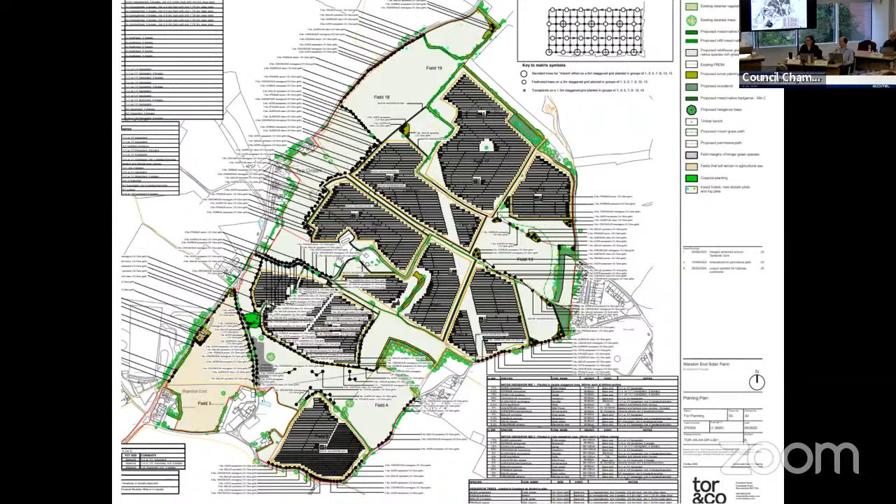This is a plan showing tree protection, with a few trees in red, category U, trees to be removed.

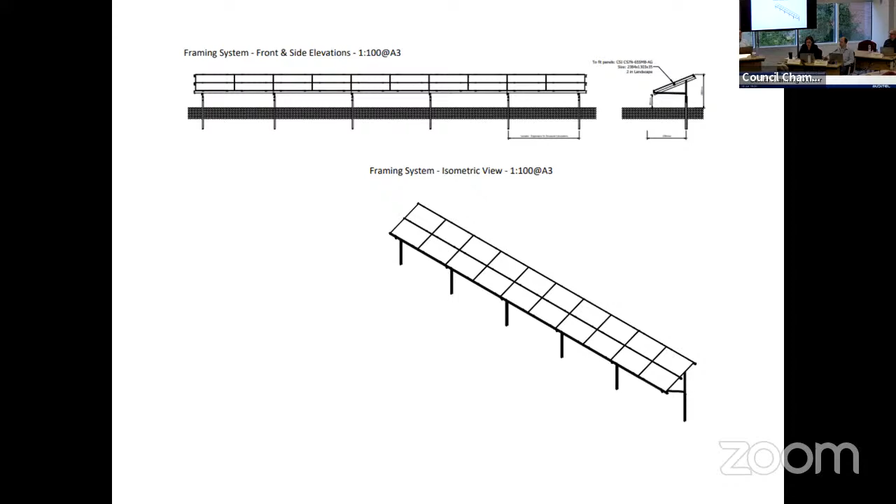This is a plan showing the typical section of the frame with panels.

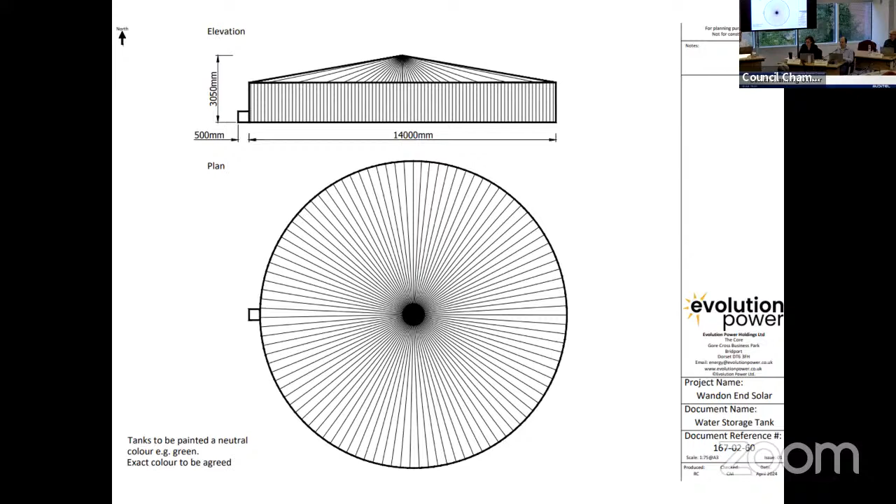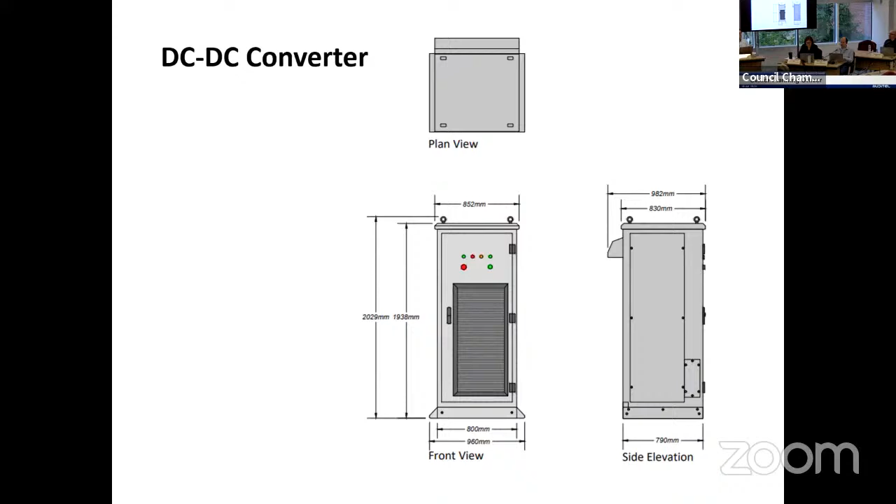This is a plan showing the proposed water tank, one of the proposed water tanks. This is an inverter. And a converter. And a typical battery container.

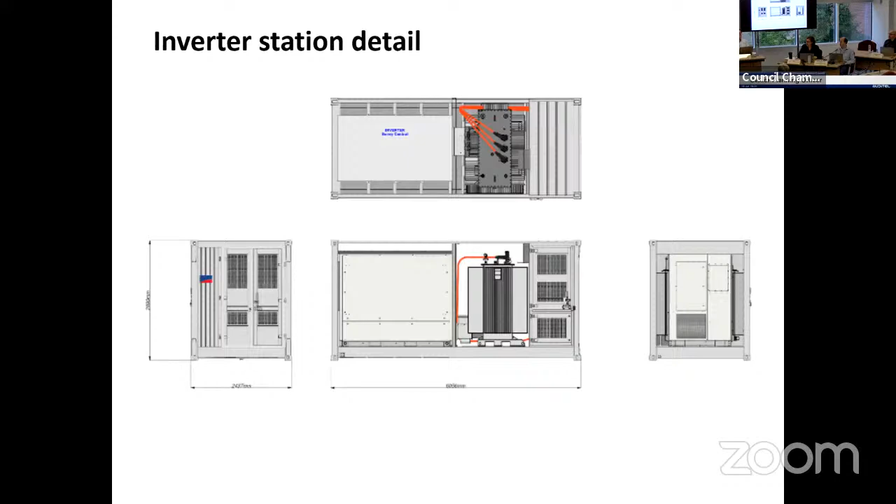Inverter station detail, and a zoomed-in section showing what the batteries would look like within the fields of panels. There'll be 11 little pods, each with 4 batteries, 6 converters and 1 inverter.

It's a little zoomed in for you, and that's it. Thank you very much.

Excellent, thank you very much Sarah. Do members of the committee have any questions for the planning officer? Yes, Councillor Brown, a couple of questions.

So there were two photographs, I think, where it looked to me like there was a crest, a crest of a hill, and the proposal suggests putting panels on that crest. Am I right in thinking that? And how visible will those be?

Sorry, do you remember where? Well, it was about the 3rd or 4th one - there was a green field where it looked like it was on the crest, and then towards the end where you mentioned the sensitive bit, you said there are going to be panels but you wouldn't be able to see them. I wasn't entirely convinced. Can you go back over those two areas?

So there are two bits - the first towards the beginning, yeah, I was at the northern end of the site.

There was kind of a plateau, and it's not until the mill, the listed building, where there's a sort of ridge that's quite well planted, and then it slopes down more dramatically to the Lilley Bottom character area. So I felt in landscape terms that the panels at the top should be kind of less dominant on that plateau, and there'd be panels on the 2 sides of that right of way.

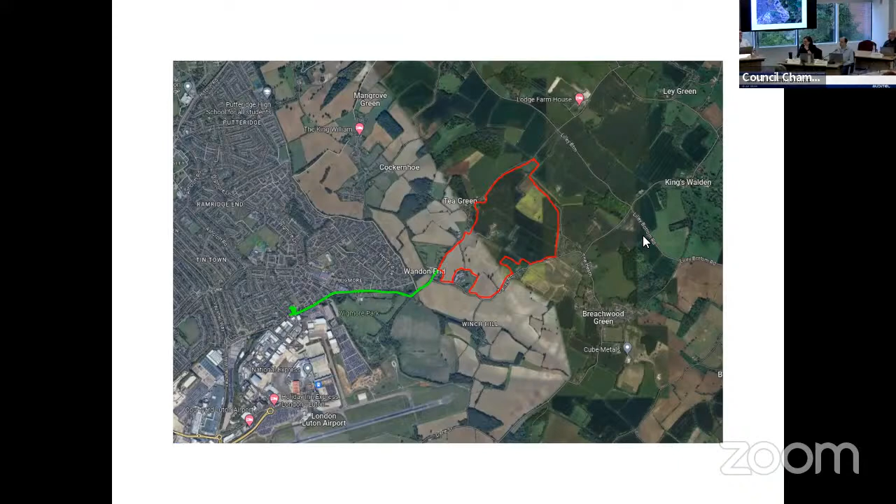While we're finding that - my question was around the rights of way, because I think when we had the zoomed-in look at the site layout, it looked like there was potentially going to be quite a narrow gap between the solar panels and those public rights of way. And I've seen the comments and notes of concerns raised by members of the public around those rights of way. So just for our benefit, what is the width between the solar panels and the next set of solar panels where the right of way dissects them?

So the right of way needs to be 10 meters wide, and presumably that's between the fencing. The definitive width of 10 meters must be preserved. There will be a right of way plan to get that detail. The amendments to the scheme have tried to secure an open side to the right of way where possible. Obviously that can't be achieved everywhere, but as much as possible.

Thanks, Chair. I think I was thinking along the same lines as you. So that access, the retained right of way, has fences on both sides. Do we have any idea of the nature of the fences? I think I saw a comment somewhere about concern about it feeling tunnel-like. Do we have any more information on the nature of the fences and lighting for that? I can see issues either way, but is this going to be somewhere people are going to be happy to walk down?

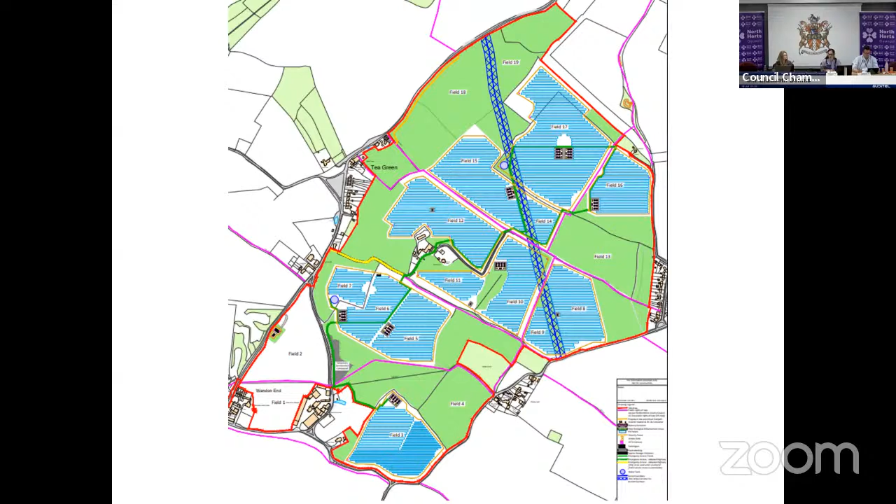The relevant sections of the NPPF have been set out in the report. I think pages 48 and 49 are quite helpful on that. We've also got comments from officers around the greenbelt, weighing up the various harms and the cumulative issues as well. There's also, later on at page 88, the conclusion on the renewable energy benefits, which has been indicated by a number of people this evening.

This is a finely balanced application, and we need to make sure that we are apportioning weight to matters that are relevant. When we set out our decision, whatever decision we reach tonight, we need robust reasoning, having taken everything into account and weighed it appropriately given the planning balance, policy statements, and this council's policies in the relevant areas.

Councillor McDonnell: I just wanted to bring up the subject of the limited time period of the solar farm. The 40 years starts from the time it starts to produce electricity, so this potentially brings it to 42 or 43 years, depending on construction time and getting it online. 40 years is just not temporary — that's potentially two-thirds of somebody's lifetime. It is a long, long period of time, and that concerns me, because for some people this will be their whole life living with these solar farms.

I'm going to put our planning lawyer on the spot and ask if there's a definition of temporary.

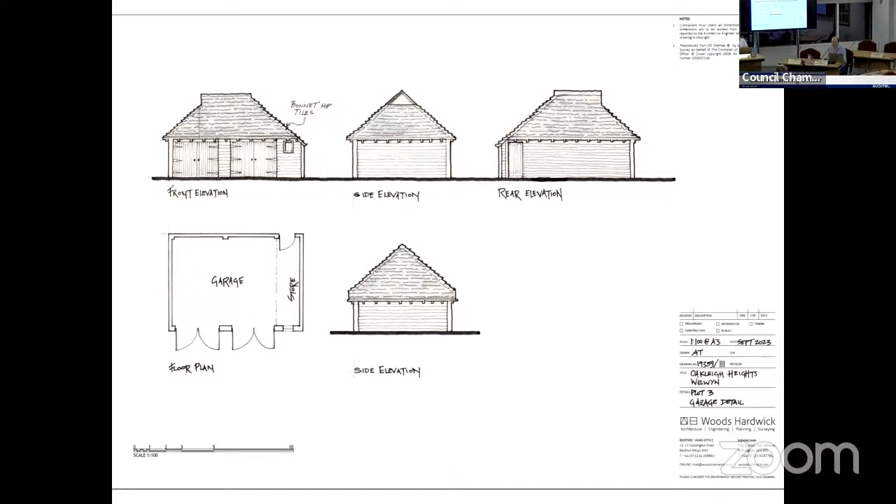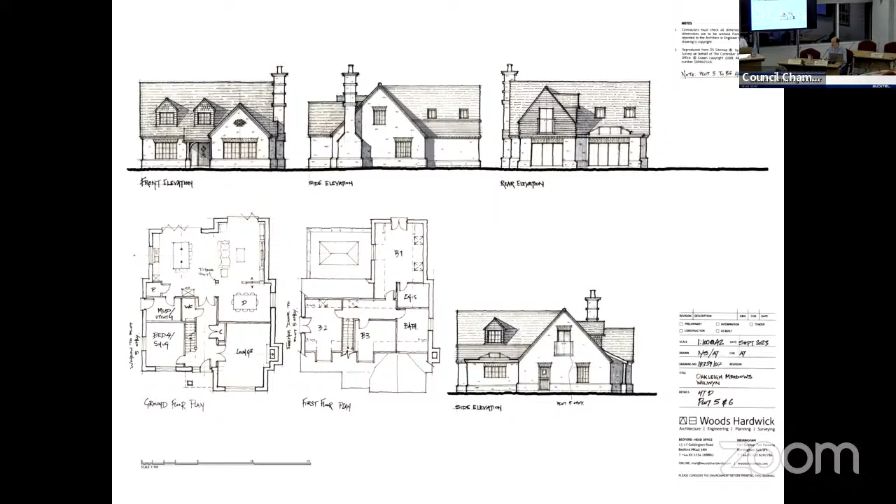The garage outbuilding proposed for plot 1. Next slide. The garage outbuilding proposed for plot 3. Next one. This is the elevations for plot 2, which is southeast of plot 1. Next one. The plot 4 elevations, which is southeast of plot 2.

The plots 5 and 6 elevations, which are south and southeast of plot 4. Next one. A garage and carport for both plots 5 and 6. And next one, plot 7 elevations, which is southwest of plot 6. Next one, an artist impression of the area focusing on the dwellings.

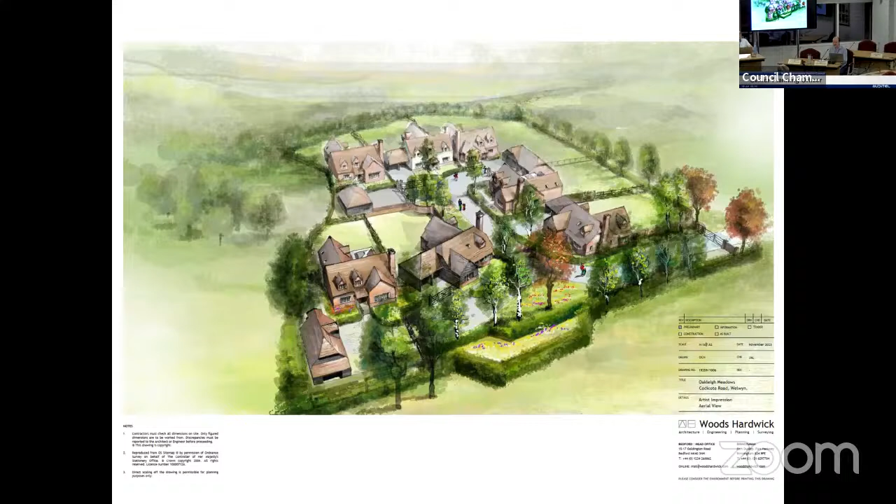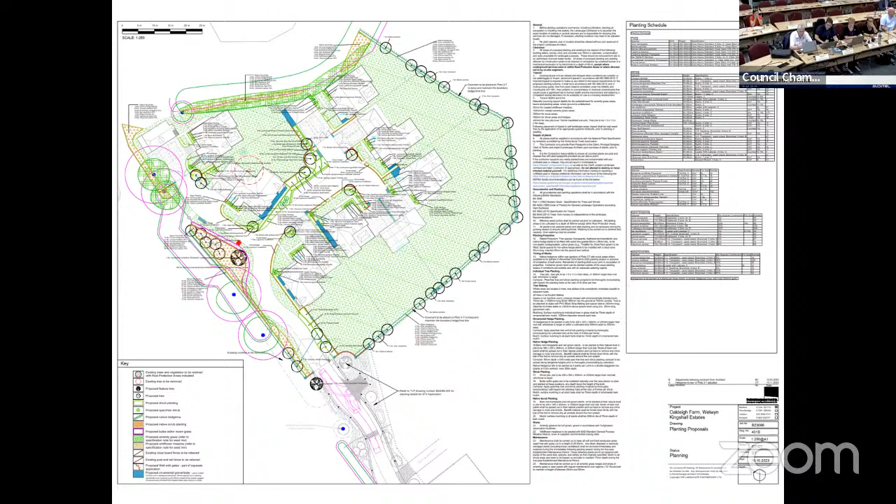Maybe cycle through the plans. Yeah, and then maybe if you want to take us through it, not necessarily gate by gate, because I think when we get to a certain point it's self-evident, but maybe explain the main gate and the closed board fences, etc.

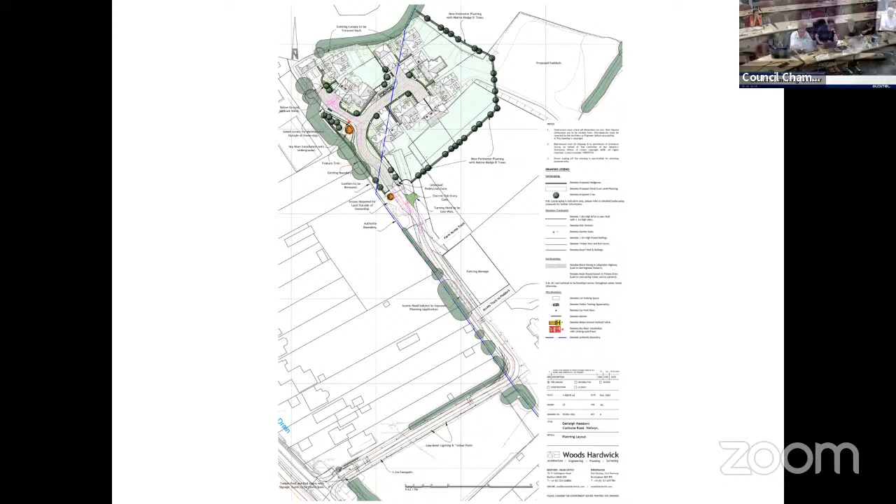Okay, so the gates are proposed to be open metal rail gates, which would also include gate posts. There would also be fences and brick walls and railings relating to the boundary treatments proposed for the dwellings themselves, which would be within that northwestern residential part of the site.

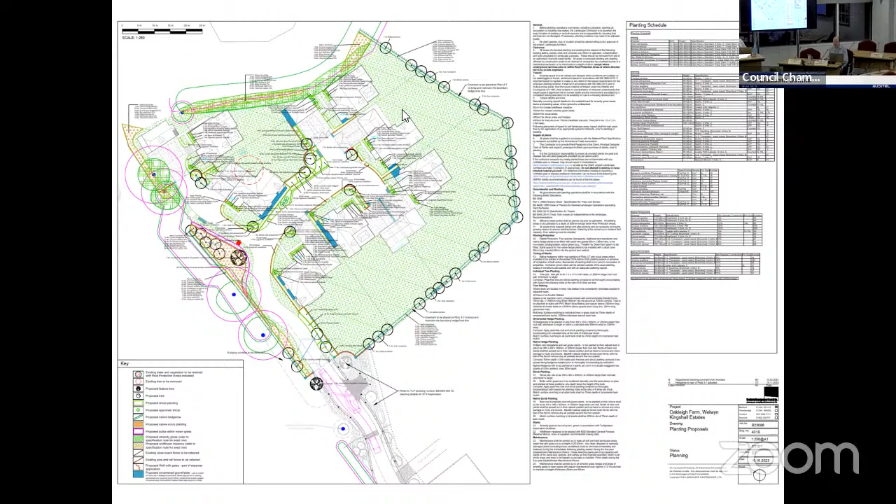I think that's a boundary treatment slide. It's the one that's got the sketches of the gates. Oh. One. Yep, that's the right one. There we go. Lovely.

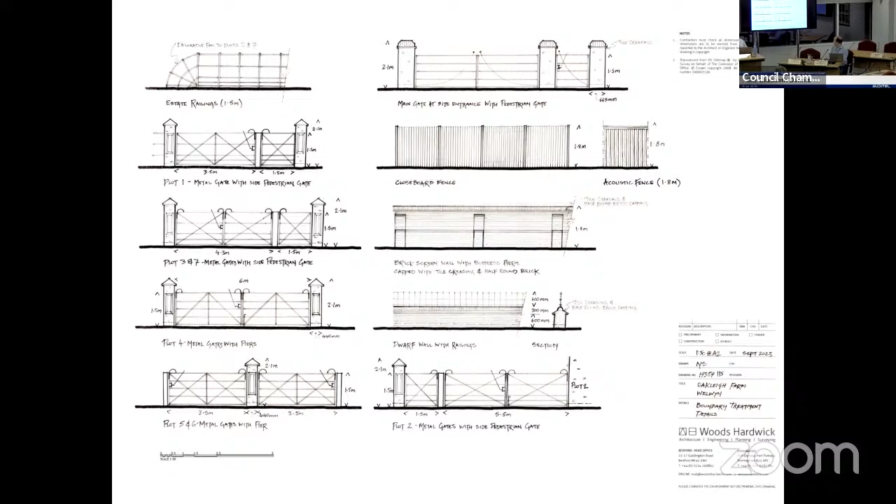Okay, so because it's a hand sketch for some of these, and it's quite small on the screen, I think the gates that are on the top right, that's the main gate. So you've got a vehicle gate and then a pedestrian gate at the side of that. The vehicle gate is fob controlled, I think, isn't it, Andrew? And the pedestrian gate is left unlocked for access.

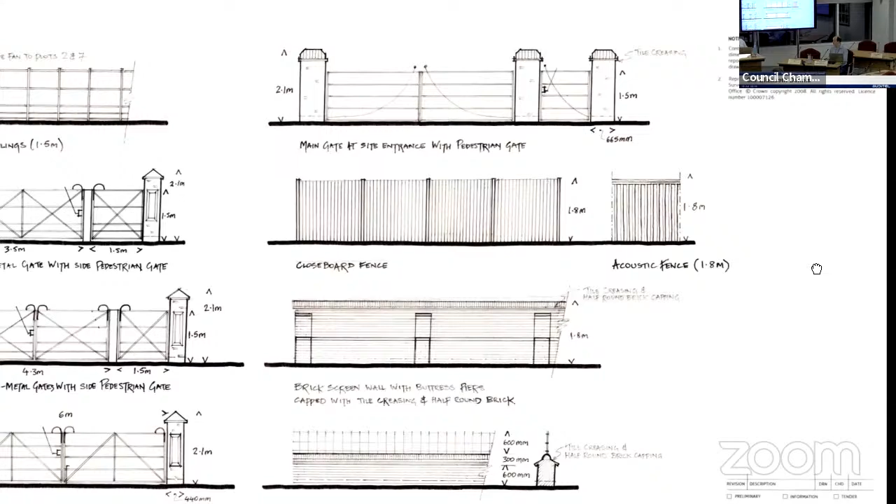Yes, that's correct. Yep. So that's the main gate to the site, so that would be the main access point. And then there's the other gates, of a similar style, but look to be manually operated for each of the individual plots. And then we've got closed board fence, brick screen, dwarf wall with railings.

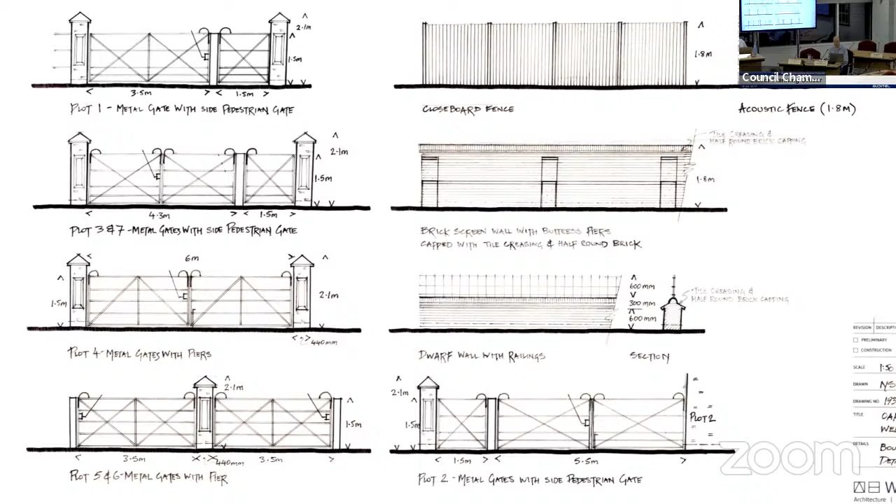Yeah, my concern is that we've always set our sights against gated communities, and it sounds as if we're being asked to give permission to a gated community against all policies and all previous decisions. That was why I raised the issue. Okay, I think that's a point to note, and possibly something that we might wish to discuss with the applicant later on.

Yep. Okay, Councillor Allen. Thank you, Chair. Mr. Hunter, in 4.3.12, it says highways have not responded. Do you know any further information on that, or why they haven't responded? Because I have concerns regarding highway safety, road safety, because this is, as I understand it, a heavily used equestrian area.

Sorry, what was the paragraph you referred? 4.3.1.2. Hang on. 4.3.1.2, that... sorry, yeah.

Am I looking at the right one? I think, are you on agenda item 7 or 8, Councillor Allen? Just because I've got a different 4.3.1.2. You swapped them round, didn't you? Yeah, I did. So we're taking the full permission first, so hold on to that point for the next item if we need it.

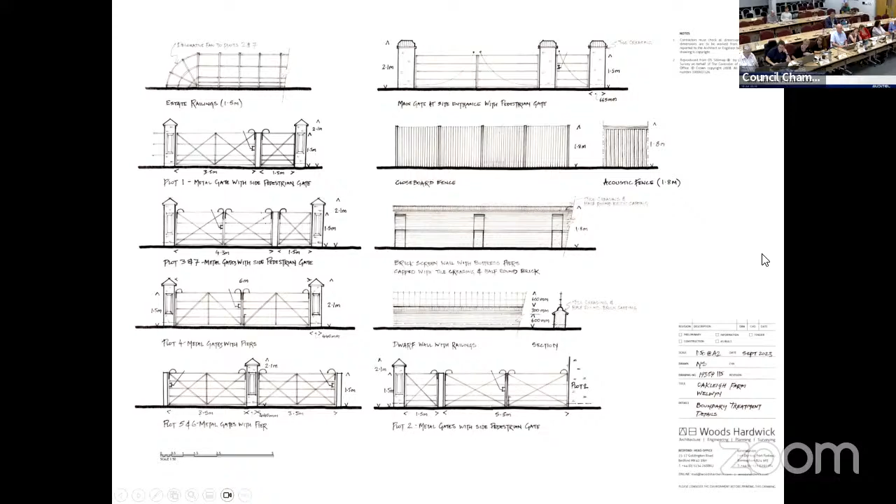Councillor Fernandez. I just wanted to ask about the access road to the site. So obviously there's going to be a gate from Codicote Road onto the site - is that right? No, there wouldn't be a gate just at the access. It's proposed to be much further round, around the road, closer to basically where the houses are.

Right, okay. And also the access road is very long - who's going to be maintaining this? Has it been adopted, or is it a private road? There is a condition recommended by the Highway Authority - I'll just find it - requiring full details for the future management and maintenance of the streets, so it could potentially be a privately maintained road. Okay, thank you.

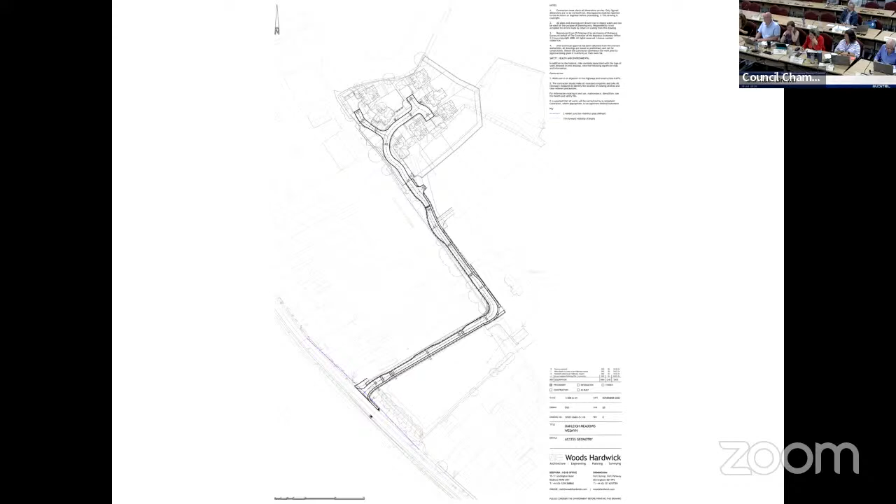Councillor Brown. I hope this is not a trivial question, but I've never come across a cross-boundary site like this, and I just wanted to know: does the boundary of the districts go through any particular building, or are they all one side or the other? And what happens about bin collections, for example? Is that one for Sean?

Well, that's a very good question. I'm not involved in bin collections myself, but it may well be that bins will be collected from those houses that are in our district from our waste provider, and those in Welwyn from the other. But I don't really know, to be honest, because I don't get involved in those matters. It is odd that the boundary is where it is.

From a planning viewpoint, an application has been submitted to us that includes all the houses in Welwyn, and an application has been submitted to Welwyn that includes the houses in our district, and we consider the whole application, despite the fact that most of it is actually in Welwyn rather than in our district. But as to who will be responsible for bins, there may well be an agreement at some point as to who does that. The access is in our district, I believe, so it may well be we collect it, but I don't really know.

Okay, and just picking up and following on from Ruth's point, obviously there are two applications being considered by two authorities. Do we have sight of what Welwyn has decided, or its process in respect of decision making? They haven't made a decision at this point. And is that likely to be via committee or delegated decision? We've been told delegated - delegated.

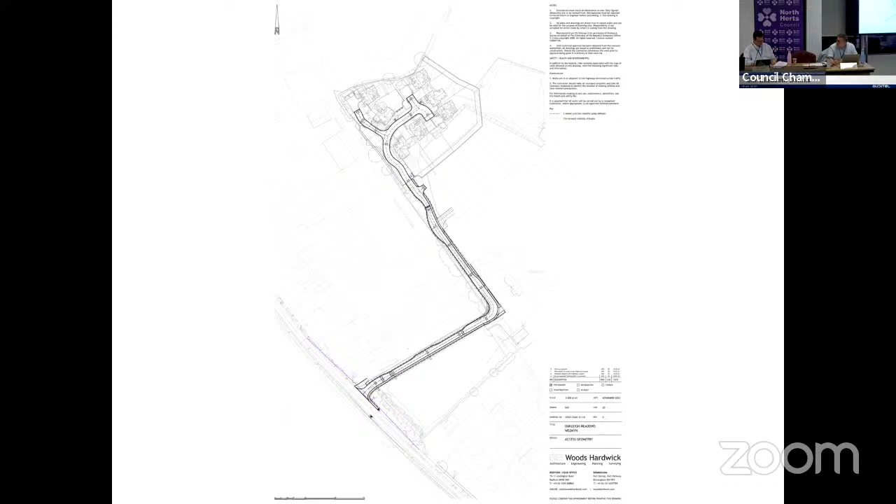Okie dokie. Right, any further questions for officers, colleagues? Nope. Okie dokie, cool. So I have got registered on this one objector, which is Ros Naylor, and I've also got Councillor Stephen Patmore as well. So I'm going to go to Ros first, as there's just you, you get an entire five minutes.

Thank you. As a resident in the area and as an equestrian in the area, and also a representative of the British Horse Society Herts Access Committee, I would like to see what provisions will be made on the impact of extra traffic in the area on an already overloaded highway system where equestrians are overlooked in terms of safety. I have lived here for 24 years and ridden on the road network in and around Codicote, and it is getting ever more dangerous. I regularly have to cross the B656, the Codicote Road, on horseback, either from my road, which is Reynards Road, or coming from Danesbury Park Road and going to or from Fulling Mill Lane. These crossing points are just along from this particular development.

Too many vehicles do not respect riders. I note there has not been a report done by Herts County Council Highways on the safety aspect of vulnerable road users surrounding this development. Horse riders and carriage drivers are considered to be vulnerable road users by the government and should always be considered together with walkers and cyclists.

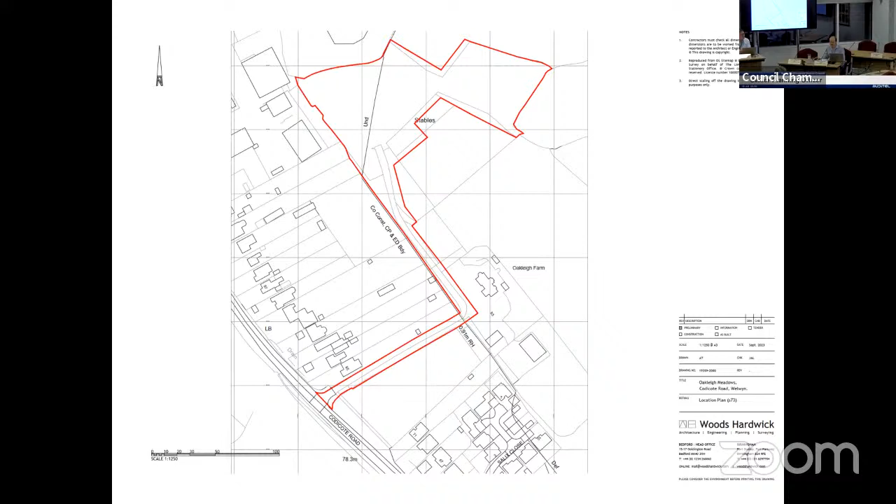So the site plan is as we've seen before. If we go on to the next one, the overall proposed layout - this shows the northern dwellings and the new paddock, which are unchanged from the 2020 application allowed on appeal, and the proposed development in terms of the alterations to the access and the road in are set out in more detail in the report.

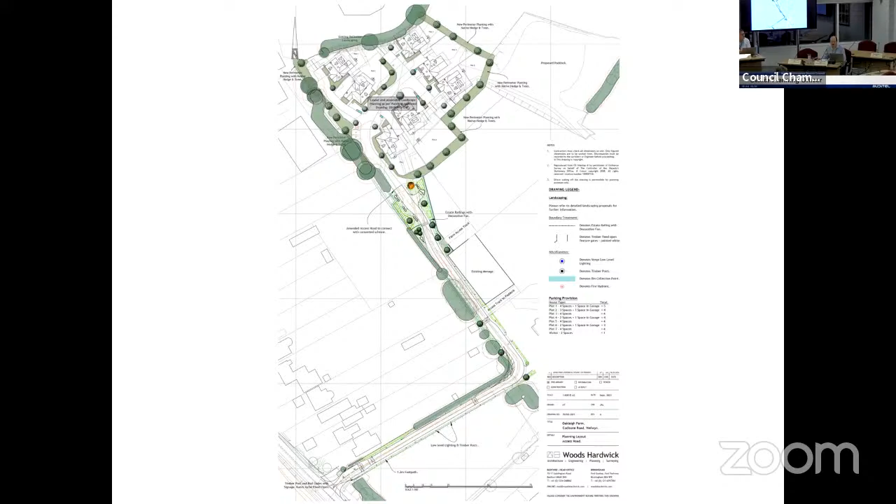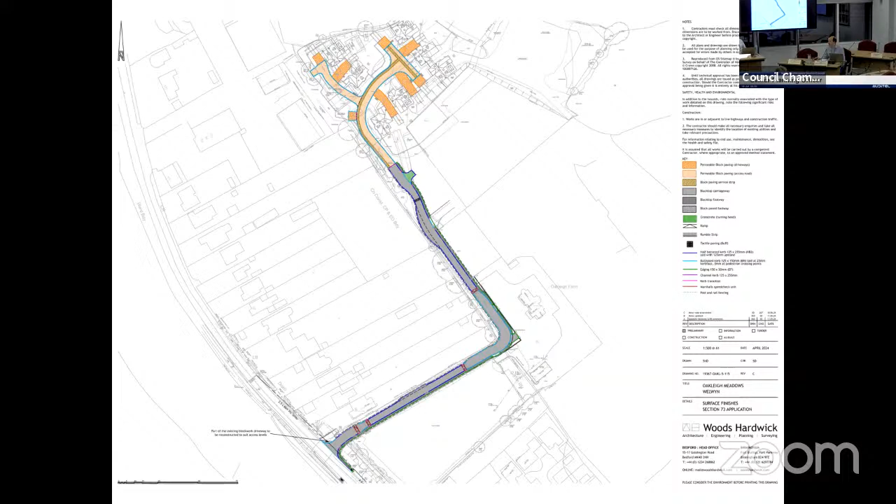This shows proposed hard surfacing. Next plan. This shows soft landscaping and planting around the access road area. And next plan.

Details of new entrance features, low-level lighting, and timber posts, which the lighting and timber posts would extend along the access road. And onto the photos then, please.

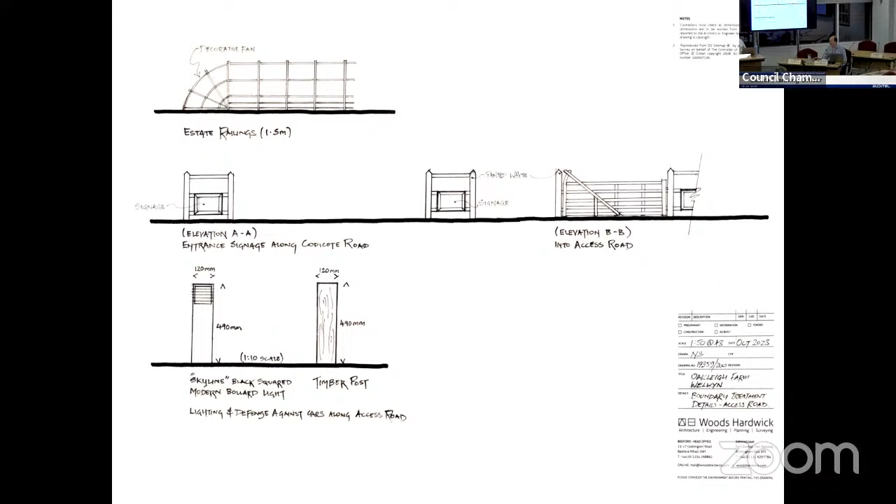Do colleagues have any questions or points of clarification for Andrew? Okay, all right. So I also have both Ros Naylor and Councillor Patmore registered to speak against this. Do you wish to speak on it? No. Thank you very much. That's very helpful.